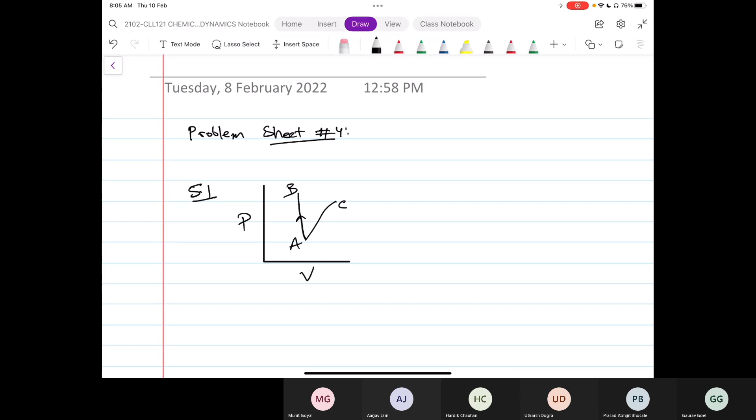Problem 5.1. It's asking you if two adiabats, two reversible adiabats, can intersect. So we are going to prove it using the contradiction route. We assume two reversible adiabats are intersecting. AB is one of those adiabats and CA is another adiabat. So let's assume they are intersecting.

Reversible adiabats are isentropic, so the entropy change along these two would be 0. And now I connect. I am free to choose any point on B and C. That means B and C I am making arbitrary and connecting them in such a fashion that the path from B to C is isothermal reversible. And we are not making any assumptions up to this point.

All right. So you can prove the contradiction now via several routes. You can show that the entropy change from B to C will not come out to be 0. So on the circular path, entropy change is non-zero. Entropy is a state function. Therefore, it violates the second law, because entropy is a state function by the second law.

Another option is that there is a cyclic process happening. So statement 1A, you can try to attempt. Statement 1A says in a cyclic process, all heat absorbed cannot be converted to work. So let us see if we can prove it otherwise here. If all the heat absorbed in a cyclic process is getting converted to work, again it's a violation of statement 1A of the second law.

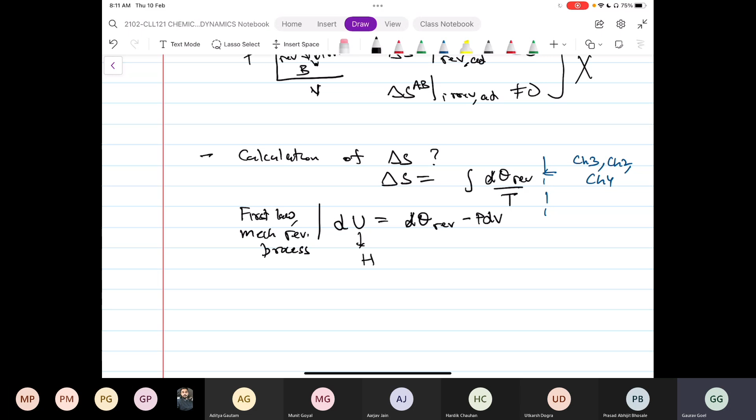I'm going to use h instead of u, and that is just because of the convenience of the final set of equations we are getting. So there is no other reason. You could have worked with u also. So I make that substitution, and this is the new equation I get.

If your process is at constant V, you will use the first one. If your process is at constant P, you might find the second one to be more convenient, in the sense that the reversible heat transfer is related to enthalpy changes at constant pressure, and to internal energy changes at constant volume. Okay, so that is why we have two options here.

So now let us look at the constant volume case. Work is 0, and we have an expression for the internal energy change, which is CV dT. So from here, now you can write down the entropy change in going from T1 to T2 as this integral. Further, if CV is constant, you can simplify it more.

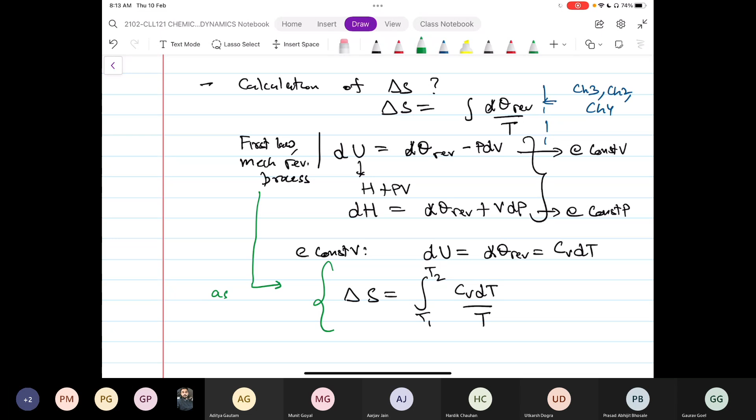Now, if you look up the derivation route, I wrote this equation by taking some assumptions. What are the assumptions I have taken in deriving this equation? Anyone? What assumptions have gone in? There is no penalty for speaking up. Ideal gases. I have not so far, right? Mechanical reversible at constant volume. Mechanical reversible, constant volume. Okay.

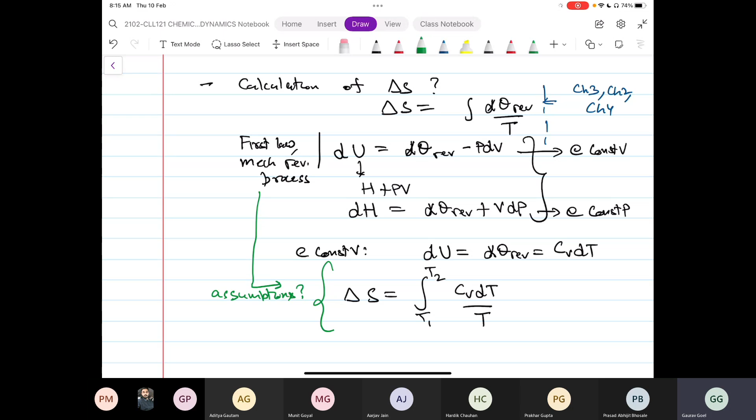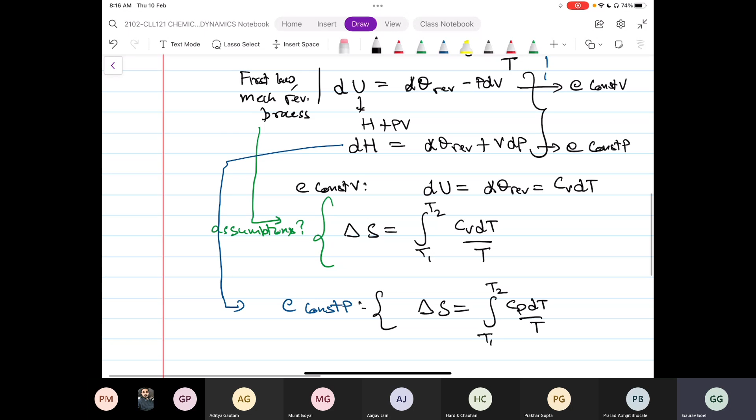Now, using this second route, at constant pressure, dq you can write in terms of enthalpy changes. And fully general, let's say the last case, where I just start at the first law and mechanically reversible. For now, I will give you the expression for ideal gas, because for ideal gas we have an equation of state available, which will be required.

What you see here is, for this part, V as a function of P and T, I am going to use the ideal gas equation of state. Once we learn how to calculate enthalpy changes and internal energy changes for real gases, we will be able to use the same route for real gases also. But for now, let us focus just on ideal gas.

So now for the fully general case, I'm not saying constant volume, constant pressure, nothing. All I'm going to do is substitute in that initial equation dq in terms of enthalpy changes and the V dP term. The reason I am doing that is going to be clear here: I get an equation where everything on the right hand side is available for me, because I know how the specific heat capacity of an ideal gas depends on temperature. So this is the fully general form.

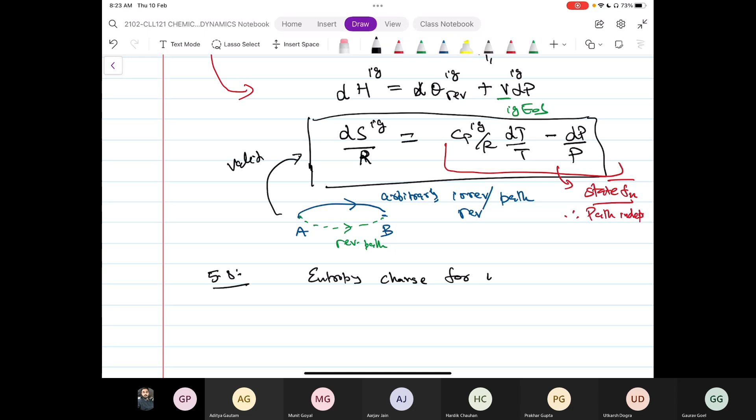So now let us try to solve some problems using this. Any query? No, sir. So problem 5.8 will make use of one of these equations, focusing on entropy change for water when its temperature is being increased at constant volume. We have already derived the relevant equation for this, so I directly use it.

Further in the problem statement, they say you can take Cv for the given range to be constant. So I get a simple expression. Now for the reservoir, they want us to calculate the total entropy change. The way this process is happening is by bringing water in contact with the reservoir at high temperature, either in one step or in multiple steps.

Calculate the entropy change of the reservoir also. In the lecture class, it has been mentioned that for the reservoir, you can assume the process to be reversible always. The main reason for that is there are no temperature gradients in the reservoir. So I can take the process to be reversible on the reservoir side always. And because the reservoir is at constant temperature, the integration would still simply give me minus Q by T.

This Q we have already obtained. This is the Q for the system. Cv they are saying we can take constant. So this is what I will get for the reservoir side. Now there are several cases given. In case A, you have a single reservoir at 100 degrees Celsius and the system is taken from 0 to 100.

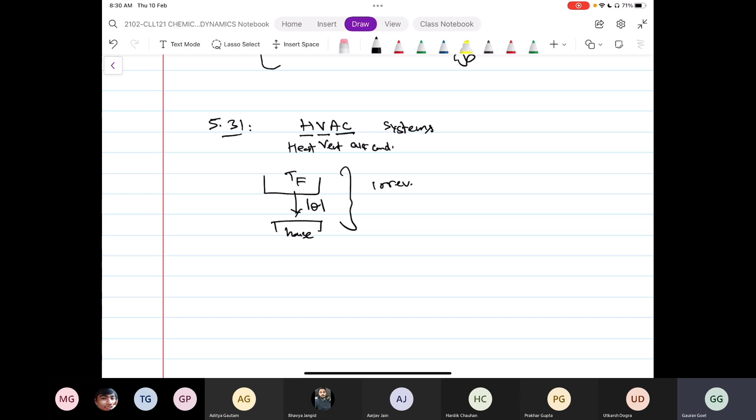So here they are giving you a very simple example. In a house, heat is provided from a furnace, and let's say the requirement of the house, that means the heat input to the house, is fixed, some value Q. This is being done essentially irreversibly. This is very similar to the example of putting a rod between a hot and a cold object. Rather than putting a Carnot engine, which gives you fully reversible transfer of heat, you are putting just a conducting rod between the two, which gives you fully irreversible transfer of heat.

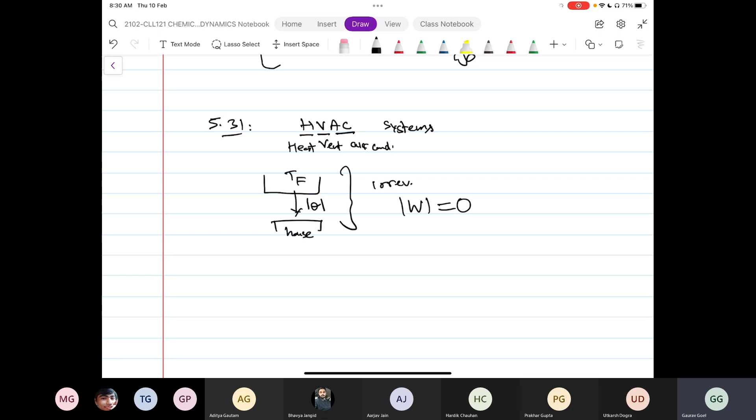In doing this, you clearly see no moving parts, nothing. So the net work output is zero. Thermodynamic efficiency in some sense is zero. You're not extracting any work from this system. Now they're asking you to look at the other extreme where you make this heat transfer reversible.

So we want heat exchange with addition of some Carnot engines and Carnot refrigerators. That we have seen in the lecture class also. So if you do this, you might be able to manage reversible heat transfer.

Okay, and if you want to make a connection to a practical scenario, then yes, it won't be a fully reversible operation, in the sense that you will not get delta S total to be zero, because you don't have a Carnot engine or a Carnot refrigerator in reality. But you can reduce the inefficiency. That is the only thing you can do. You cannot make inefficiency zero, you cannot make lost work zero, but you can make it smaller.

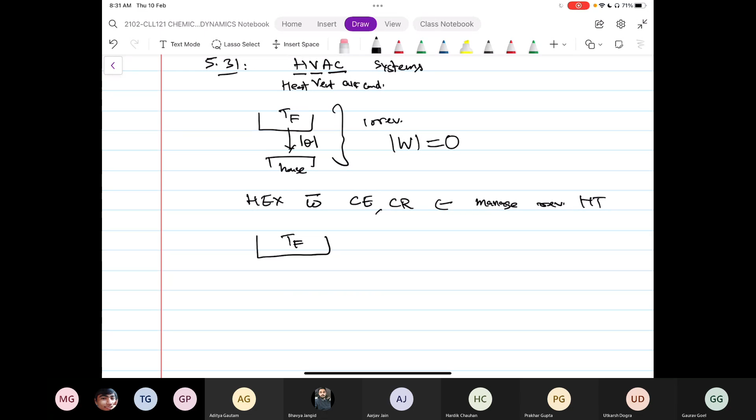Now our design involves putting a heat engine, furnace, and the house. Again, you can compare it to other processes. For example, throttling: you go from high pressure to low pressure without obtaining any work. So in some sense you are wasting resources. If I look at a Mercedes high-end car, they are using CO2 as a working fluid, and they have replaced the throttle by a device which can produce work. They call it a turbo expander. So something like that we are seeing here also.

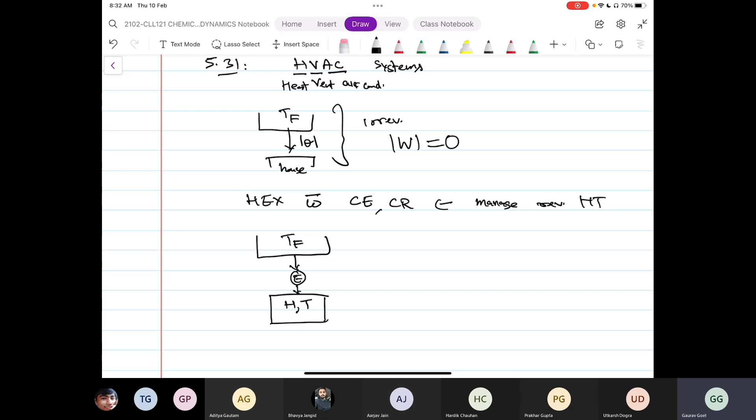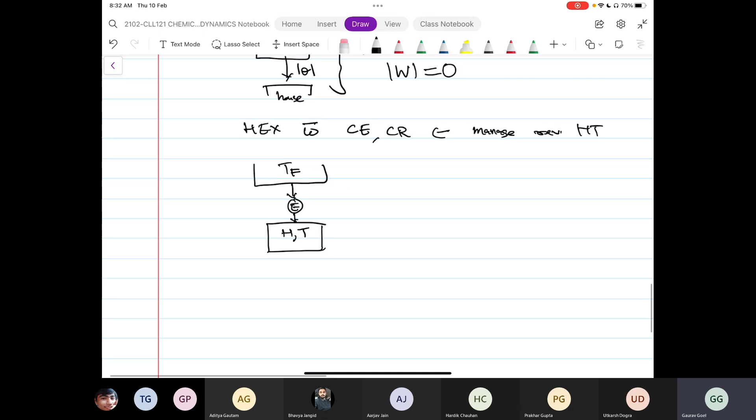So putting a heat engine between two reservoirs, one at high temperature TF, the other which is my house at temperature T. Now we use the work produced by this heat engine to drive a refrigerator, which is able to move the heat from low temperature. I have surroundings, the outside of the house, at some low temperature, maybe 0 degrees Celsius. Let's say I want to maintain the house at 298 Kelvin, 25 degrees Celsius. So we use the work obtained from this furnace to drive a refrigerator.

You can put now the Q values. The heat extracted from the furnace, let's say, is QF. Heat added to the house from the top side is Q1. Heat added to the house from the bottom side is Q2. Heat extracted from the surroundings is, let's say, Q sigma. So these are all my individual numbers. One constraint is that the total heat added to the house is the same as the irreversible case. Total heat added is still Q, but now we are doing it via a different route. Black box of sorts, you will see the house is still getting the same net input of heat. So we have not changed that design element.

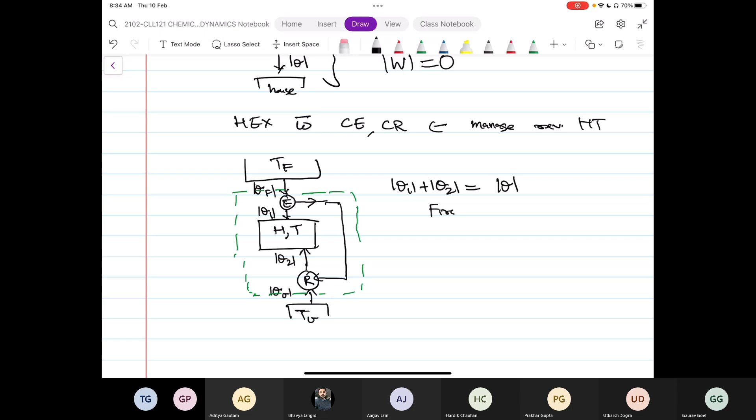Now to obtain my unknown quantities, I will combine the first law and the second law. So this is the net heat added. Yes, this will also be fine because the work term from the engine is cancelling the work term from the refrigerator. So you will get QF plus Q sigma equal to Q. That is my first equation. Then you put the second law because the process is reversible, so the total entropy change must be zero.

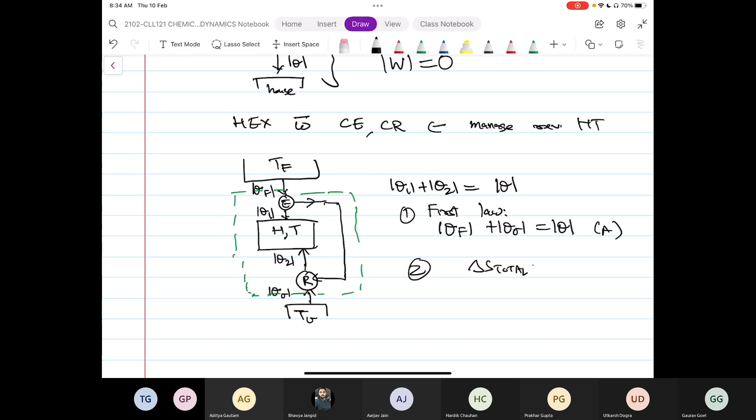So you have a reservoir, which is the house, another reservoir, which is the furnace, from which you are removing heat, therefore the minus sign. One more reservoir, which is the surroundings, from which again you are removing heat, so again the minus sign. In the house, you added heat, so the plus sign. So this is your second law. Now you can just combine these two equations and obtain the unknowns. Again, there is not one way to solve this problem. You could have used the first law and second law individually on the engine and refrigerator. It will increase the maths, but of course you will come up with the same answer. Right? Any queries?

Problem 5.10 is somewhat similar to what we did in the lecture class, as well as one of the papers which I shared. It is asking you to look at heat exchangers, two different operations. Co-current, where both the streams, the hot and cold, are flowing in the same direction. Counter current, where the two streams are flowing in opposite directions.

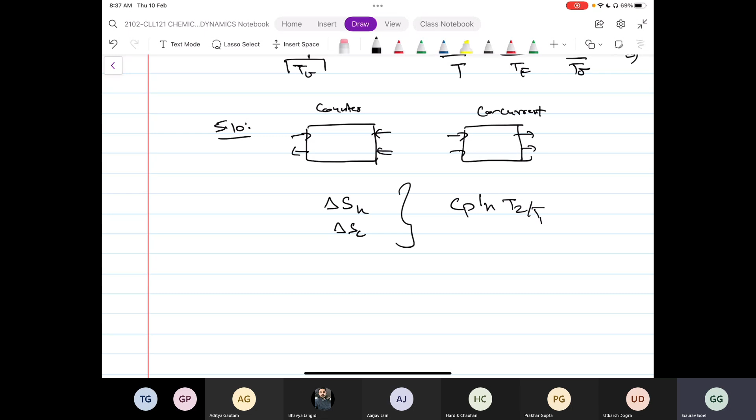If it's a liquid, you are okay with ignoring the entropy dependence on pressure for small changes in pressure. A 5-10 bar change in pressure, even a 20 bar change in pressure, will not matter. If the flowing streams are gaseous, then you will need to include pressure dependence also, because for gases, properties are dependent both on pressure and temperature kind of equally. So this is the formula you will use, and the total entropy change would be just the sum.

And this you can obtain from the entropy balance equation also. Here I'm writing it directly, but you can obtain it from the entropy balance equation. So S gen dot, if you want to calculate, will again come out to be the total entropy change for the flow streams in this case. For case A, given the numbers, this is what you will get. Clearly you can see the process is irreversible.

The inlet temperature of the hot stream is changed from 320, I believe, to 200 degrees Celsius. And still the same delta T is obtained for the cold stream. The inlet temperature of the hot stream, I have decreased it, but I'm obtaining the same temperature change for the cold stream. So what needs to happen?

Total entropy change is 0? No. The process is still irreversible. But the question is that I have decreased the inlet temperature of the hot stream. I have not changed the inlet and outlet temperatures of the cold stream. I have not changed the flow rate of the cold stream. So what needs to happen so that all these constraints are met? You will need to change the mass or molar flow rate of the hot stream. This kind of refers to the paper I have shared.

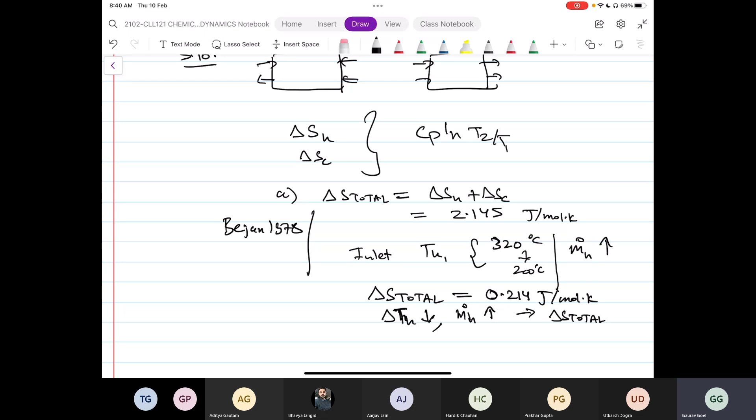Let us see right now, because we are not going to look at the fluid dynamic aspect. So you will see the change decreases. If you do the calculation again, the total entropy change in this case is going to become smaller. So you can clearly see that if I only consider the thermodynamics, if I was only considering this aspect of irreversibility, it makes sense to continuously decrease delta TH and continuously increase mH dot, because doing this will make sure that the total entropy change, that means the process inefficiency, is as small as possible.

However, as discussed in the lecture class, as we increase the mass flow rate, viscous friction effects increase. Think of a pipe flow. If you go to higher flow rates, frictional losses are larger. Those frictional losses also contribute to Sg dot, which we have not discussed in this course at all, but the paper I have shared discusses. So this other contribution to the entropy change, which we have so far ignored, cannot be ignored at high mass flow rates, and therefore there will be an optimal flow rate at which the process inefficiency is minimal. If I only looked at thermodynamics, we would keep decreasing the inlet hot stream temperature, keep increasing the flow rate, and improve process efficiency. However, that is not the case. Any questions?

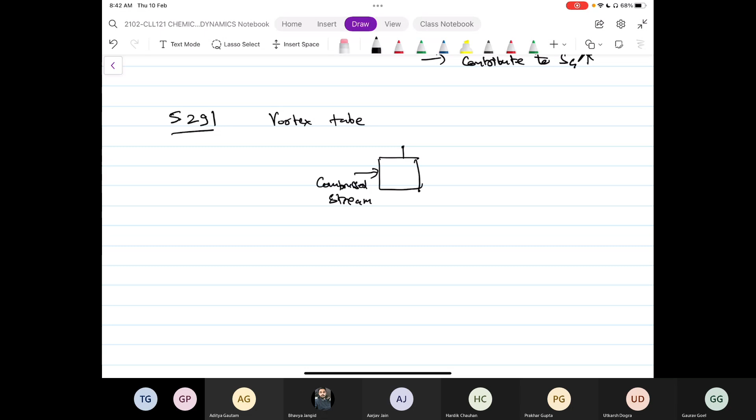Problem 5.29 is essentially an example of the working of a vortex tube. Of course, the vortex tube doesn't look like this. We are just putting a box around the vortex tube. It involves an inlet of a compressed stream at room temperature, and as an outlet, it gives me a hot stream and a cold stream.

So without any refrigerator, without any engine, just by using a compressed stream, I'm able to obtain a stream which is above the temperature of the inlet and another stream which is below the temperature of the inlet. So I can use it in processes where I cannot easily put heat engines or refrigerators, and I still want heating or cooling. That is one means, and that is why it is used in industry.

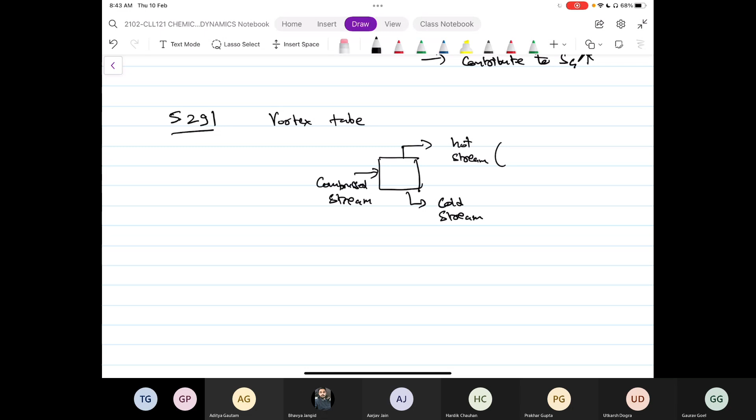Fraction of hot stream is eta H, or NH, whatever you want to call it, and the cold will be 1 minus eta. Okay, so we have, let's say, 1 mole of inlet; eta is hot, 1 minus eta is cold. A typical use of this kind of setup is in spot cooling applications, where you don't have a very large heat or cooling requirement, but you are restricted in space. This will be a very nice setup to be used there.

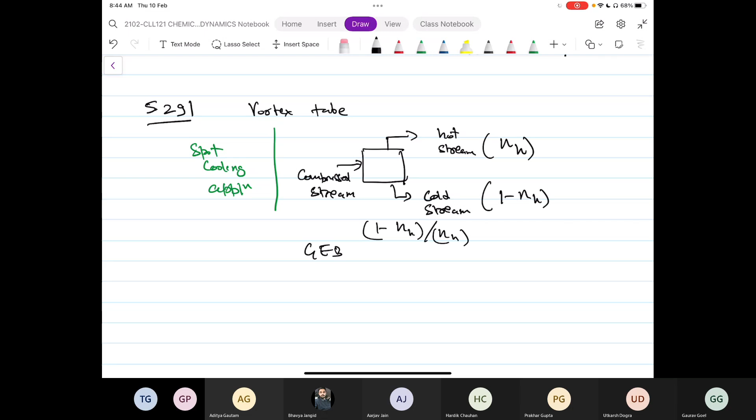So the question they are asking you is how much cold stream you are getting per hot stream at the outlet, or you can say how much cold stream you are getting per mole of inlet stream, whatever way you want to ask it. Okay, so this answer you can get by simply applying the general energy balance. Okay, and what you will obtain is

processes are adiabatic, no moving parts, etc., etc. So these are the standard assumptions which we are taking. So this is the equation you will end up getting, and now delta H equal to 0.

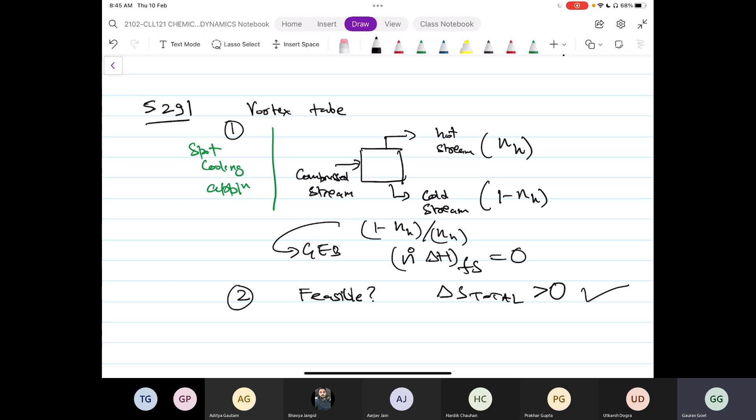The second part they are asking is, all right, you have designed this process, but is it feasible? The feasibility check in thermodynamics at least requires you to calculate the total entropy change. If it is not violating the second law, it is going to be feasible. So you calculate the total entropy change, all the numbers are given, and you would indeed find that the total entropy change is positive. That means the process is feasible. Okay, any queries?

All right. So this 5.29 in a way gives you the thought process you have to take up when designing a new system. You ask what endpoints you want, what initial points you have, the feasibility, and the reversible process that gives you the best you can get. Of course, whether you can do it or not, and secondly, how much, what is the cost? Okay, what is the inefficiency? And then you can go to the next step, which is actually designing the process.

5.39 gives you an example of a turbine, which is producing some work. So this is an adiabatic expansion process. So these are the given details, okay? And the process is given to be irreversible. Again, right now we are restricted to using ideal gas as a working fluid. In Chapter 6 and Chapter 7, we will use real gas as a working fluid, and we'll talk in much more detail about how to design turbines, okay?

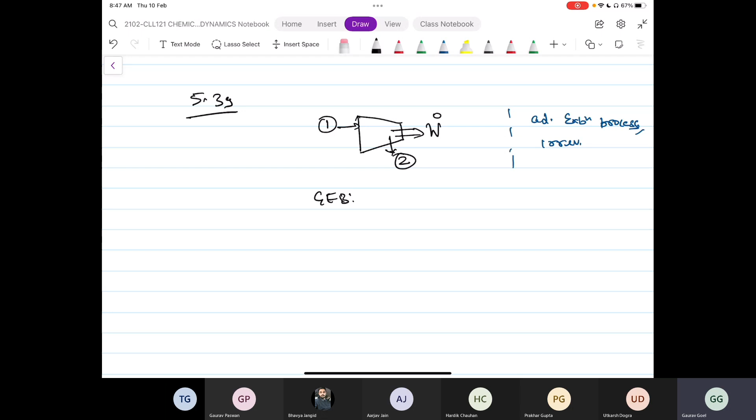So we are going to see just the initial aspects of that, but much more detailed analysis on turbine design in terms of inlet conditions and outlet pressure, we'll talk about once we get to Chapter 6 and Chapter 7, where we can go to real fluids. For example, one very standard fluid used in turbine applications is steam. Okay, so water, steam. We'll discuss how to design a turbine with water or steam as a working fluid. So you apply the general energy balance, which you have already done in Chapter 2. And the work output from the turbine you will be able to write in terms of enthalpy changes only. I'm just using the standard approximation which we have done earlier also.

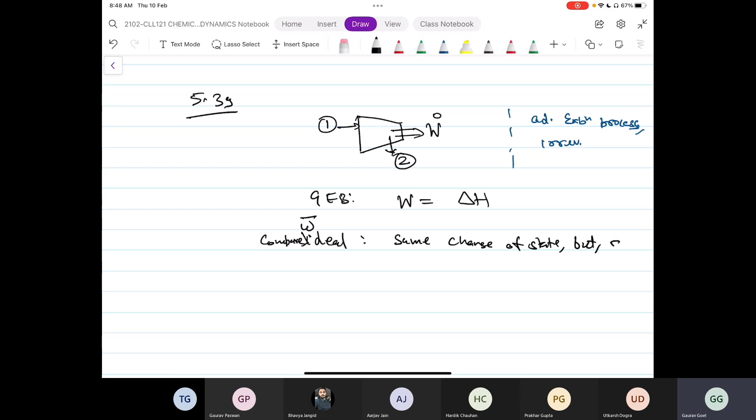Now they're asking you to compare this actual process against the so-called ideal process. We have defined the ideal process as a process with the same change of state but carried out reversibly. Okay, that is how we have defined our ideal process. And the efficiency which comes out is known as thermodynamic efficiency. Another kind of efficiency is typically defined for turbines. If you go to the market and look at the turbine data sheet, sometimes you will see the word isentropic efficiency mentioned rather than thermodynamic efficiency.

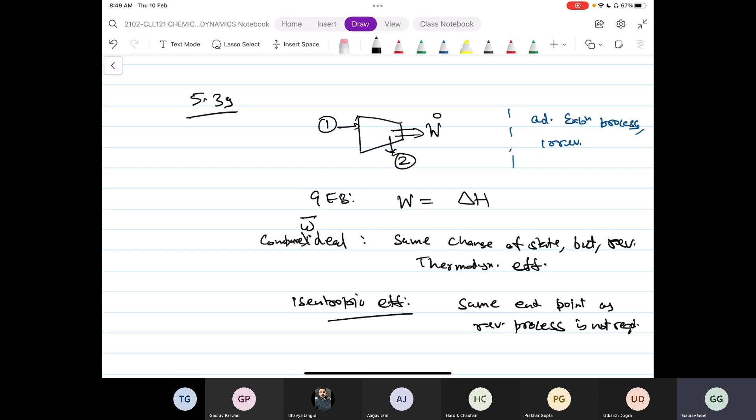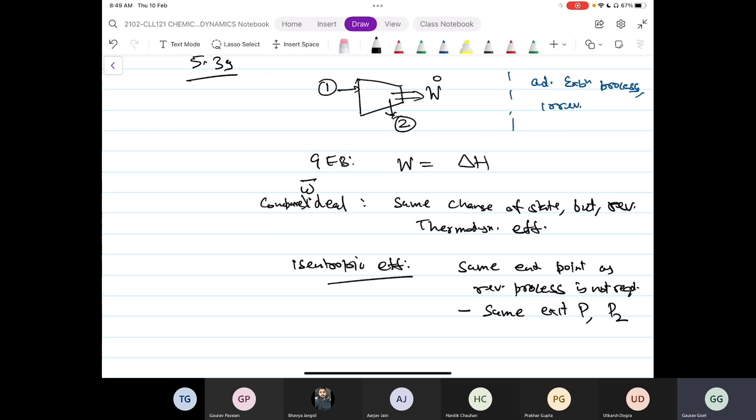And the reason is that for turbines, the same endpoint as the reversible process is not required. So it does not form the correct comparison. The end state exactly is not required. Rather, I have a constraint on the exit pressure. On the inlet, I have a constraint on P and T, that this is the P and T I am working with. However, on the outlet, I am not so much concerned about the temperature. Rather, I am only concerned about the pressure at the outlet. Okay. So we define the comparison point as an adiabatic reversible process with the same exit pressure. Okay, and adiabatic reversible means isentropic. So that is why we call this kind of efficiency isentropic efficiency.

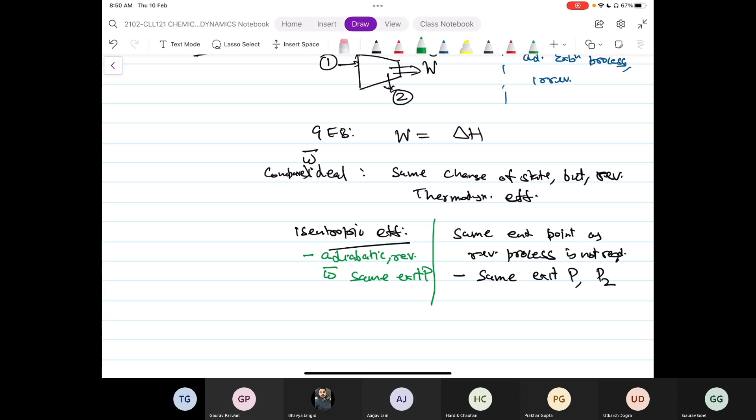So you can try to do it for both cases. Your actual process is adiabatic and irreversible. Now let us look at the ideal process as per the thermodynamic efficiency: the same change in state.

The process I can say is reversible, that is a requirement. Further, I can say for sure the process is non-adiabatic also. This I'm leaving to you to show that indeed that would be the case. Okay, so if I'm comparing an adiabatic irreversible process, this I've actually discussed at the very beginning of this tutorial. So I'm comparing an adiabatic irreversible process

against a reversible process. Okay, so here the comparison is between adiabatic irreversible and reversible, between the same endpoints. These three things say for sure that that means the ideal process would be non-adiabatic. Okay, so this I'm leaving to you.

In terms of calculation, all the equations have been given. For example, for the ideal process, the work done we have stated. For the case of single flow in, single flow out, steady state, steady flow operation, etc., this is what you end up getting. Okay. So the numbers I will give you so that you can check your calculation. The actual work comes out to be 3753. Ideal work would be larger or smaller, magnitude wise? Larger. The lost work is the difference between the two.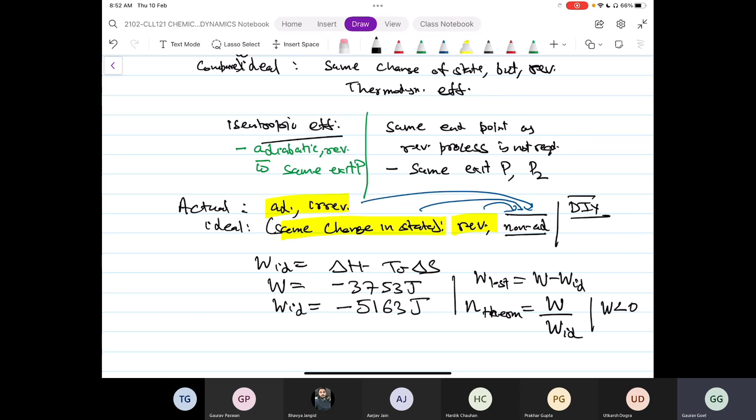So 5.45 is again looking at the turbine, and the analysis of this problem would come in very handy when I talk about design of a turbine to improve its efficiency. Okay. At this point, the analysis is simple. They're talking about two possible endpoints, 2 and 2 prime. 2 is the actual endpoint, and 2 prime is in the ideal case, ideal isentropic case. Okay, so this is the other aspect which I talked about just now, that for turbines, rather than talking about thermodynamic efficiency, we rather talk about isentropic efficiency. So both the processes now, 2 and 2 prime, are adiabatic. Irreversible process because that is the actual process. 2 prime is our reference process, which is the reversible process. Okay, so those are the details which are given to us.

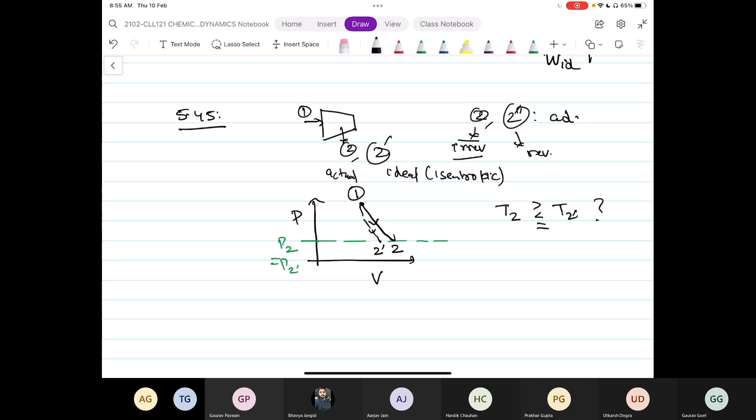Yes, I am going from 1 to 2. And in other case, I'm going from 1 to 2 prime. Okay, so the location of 2 and 2 prime, I have actually drawn after solving the problem. What they are asking in the problem, they are asking us to compare outlet temperatures. Okay, so is the outlet temperature in the ideal process equal or greater than the actual process? So that's what they are asking us to do. All right, so let us see how to do it.

I know that for the reversible process, entropy change would be 0. Okay, and for the irreversible process, it would be positive. Why I am writing down the second law in terms of system only? It is applicable to the total entropy change. But here I have written the second law for the system only. Why? Because it is adiabatic. And therefore, del S surrounding becomes 0. Perfect. So entropy change of surroundings is 0.

Therefore, the second law is reduced to entropy change only. All right. Now we already know how to calculate the entropy changes for the system. So for the irreversible case, because now the working fluid is a gas, therefore I will need to include both temperature and pressure effects. And I'm taking the gas to be an ideal gas. For the reversible, temperature change is from T1 to T2 prime. The second term is the same as the irreversible part. Okay. And now you take the difference of the two, delta delta S. Looking at these highlighted things, you can see that this quantity must be positive because irreversible is positive, reversible is 0. And from the maths, I can find out the expression for delta delta S.

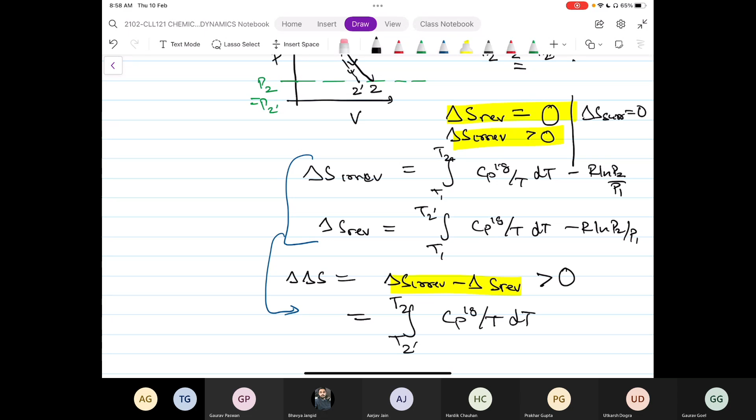And from here, I can conclude this quantity needs to be positive. So the entire thing we have reduced to this last boxed equation. If this is the case, it can only happen if T2 is greater than T2 prime. The maths proof I leave to you.

So why can I say this convincingly without any doubt? What are the requirements on the integrand which ensure that I can indeed say T2 must be greater than T2 prime? Anyone want to tell it now? Or maybe you look later, go to your high school maths, and find out why this is true.

All right, so that's all from my side on chapter 5. And now we have several minutes left. If you have any queries or questions on this chapter or chapters before, you can ask.

Sir, I guess CP ln T2 by T2 dash will come on integration. So if you take CP constant, then yes, it becomes easy, right? You don't need any theorem. But if CP is not constant, it's a function of temperature, then what are the requirements on the integrand? So you're right. If I take CP to be constant, then it's very easily seen mathematically that ln T2 by T2 prime comes out to be positive. So therefore, T2 is above T2 prime, right?

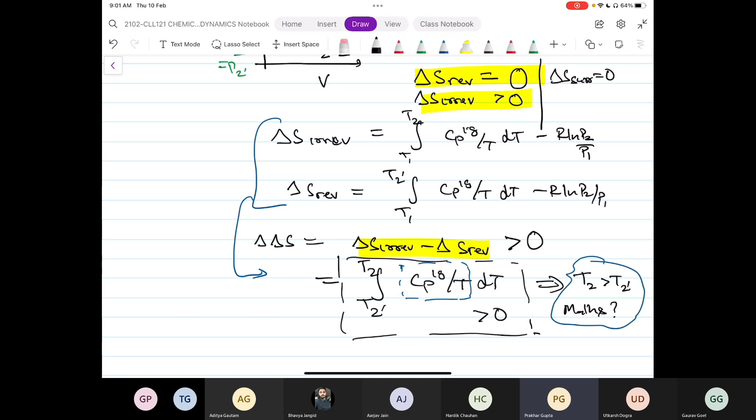So, sir, I'm asking about the general requirement for CP we are considering. What should be CP by T, the integrand? What should be the general requirements for the integrand for this to be always true? Okay, I got it.

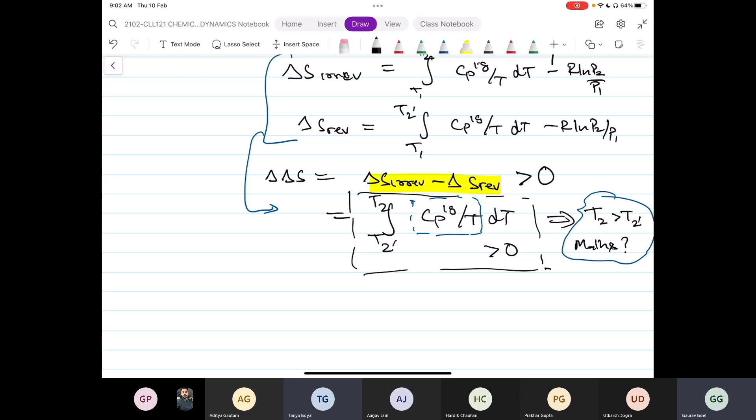Any other queries from previous problem sheets or from the lectures, please feel free to ask. Sir, I had a doubt from lecture 5, where we were discussing the PV phase diagram. You had said that when P is greater than P saturated, then T is less than T saturated. But this was not evident from the graph. How are we concluding that T is less than T saturated from the PV diagram? I was not able to visualize it properly.

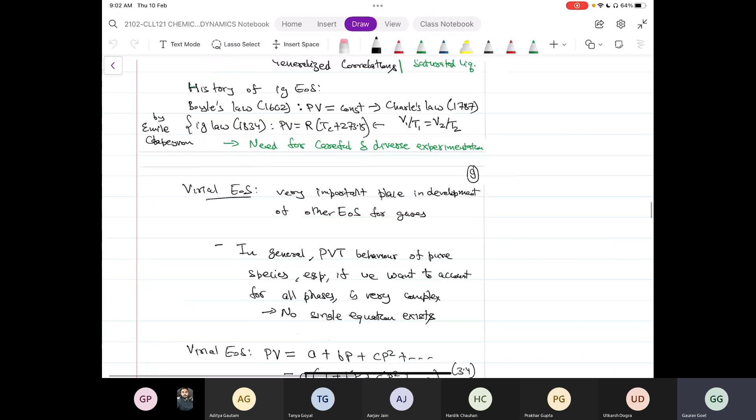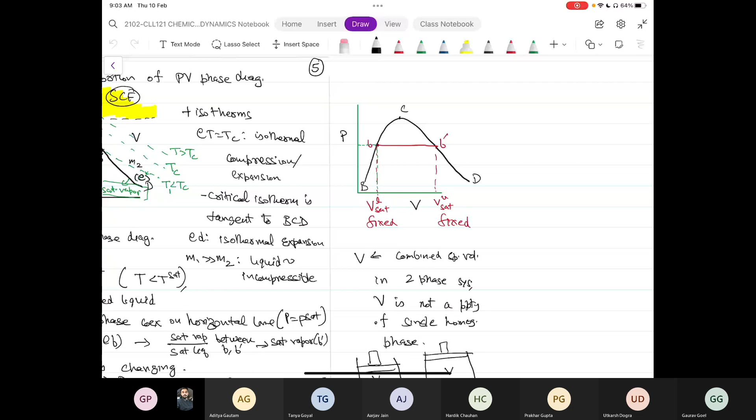Now, the other way to visualize this would be to fix the pressure and compare against the saturation temperature at the given pressure. So you can see by that route, the actual temperature is less than the corresponding saturation temperature. So to give either of these two statements, I need to either fix the pressure and ask what is happening to temperature, or fix the temperature and ask what is happening to pressure. Yes, sir. Understood.

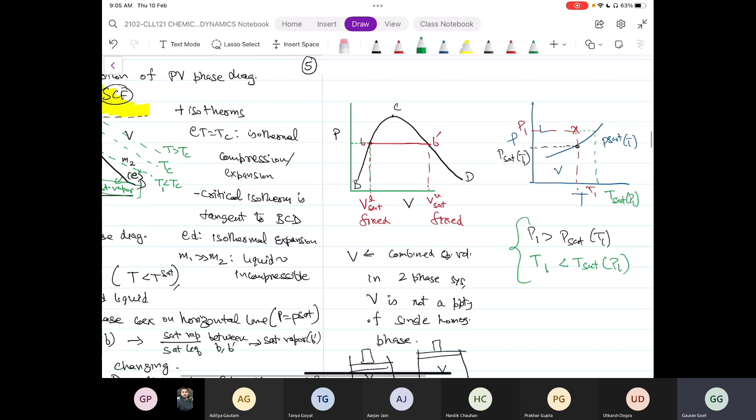It clarifies now. Yes, sir. All right. And so one trivial doubt: if two bodies have the same temperature, is that a sufficient condition to say that they are in thermal equilibrium? Yes. However, what I will also say is they need to be in thermal contact.

If you recall, when discussing these concepts, I talked about two chambers which might be separated by an adiabatic partition. So the concept of thermal equilibrium, or any equilibrium, mechanical equilibrium or reaction equilibrium, is valid only if there is a possibility for that gradient. If they are not in thermal contact, then even if they are at the same temperature, I will not say they are in thermal equilibrium.

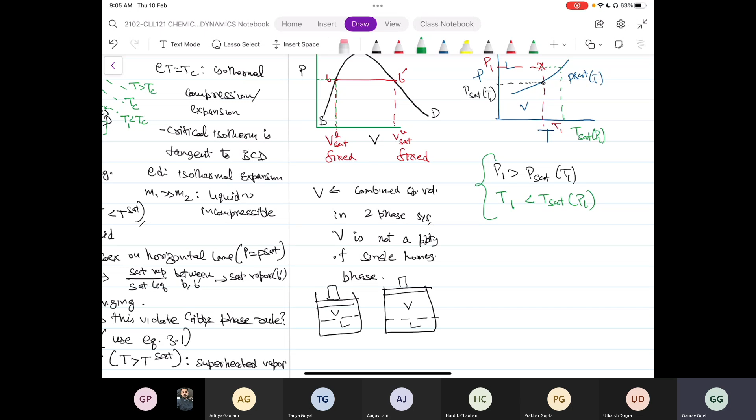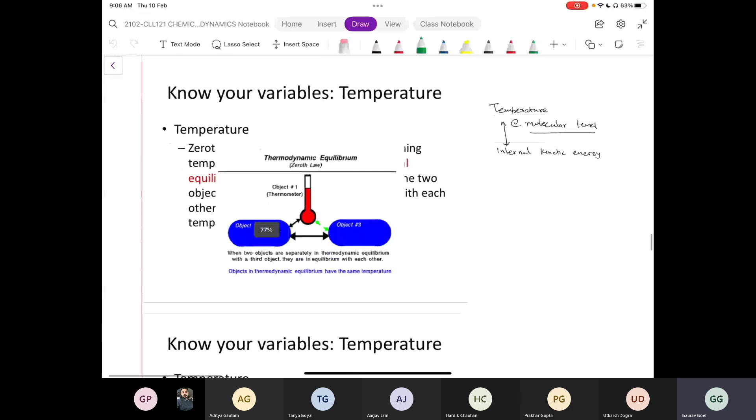You go back to the zeroth law of thermodynamics. Let's see if it's here. Yes, right. So that was our definition of thermodynamic equilibrium. It categorically stated object 2 is in thermal contact with object 3. So if there is no thermal contact, there is no concept of thermal equilibrium. Okay, sir.

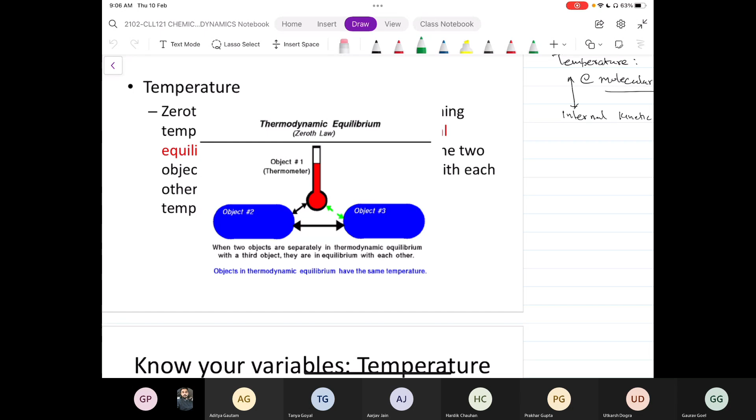Other questions from the problem sheets or from the lectures or anything else? So we can close the class. Okay. Yeah, please go ahead.

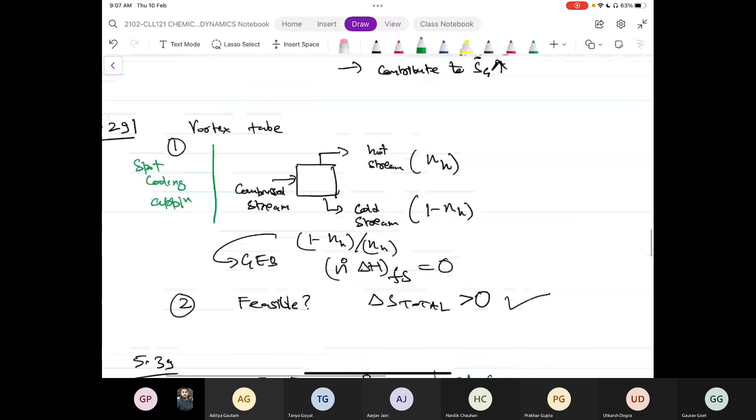In that question of the HVAC system, can we use that engine-refrigerator combination which we discussed in the last lecture, last slide? I mean, that's what we are doing here, right? In a way. In that system, the refrigerator would be taking up heat from the house and giving it to the outside. You mean I don't need the furnace at all? No, not the furnace, the T sigma part, the lower part. Okay, understood.

So see there. House at T. So you're saying essentially if this is the scenario, right? And I believe there was some other temperature there also, and then you had surroundings, something like this. You can have T sigma here and you can have TF here. Maybe that would be exactly what we are doing in this case. So you are putting heat from the furnace. So what do we want here? T sigma. Easiest could be maybe we actually make this as TF. This could be your house.

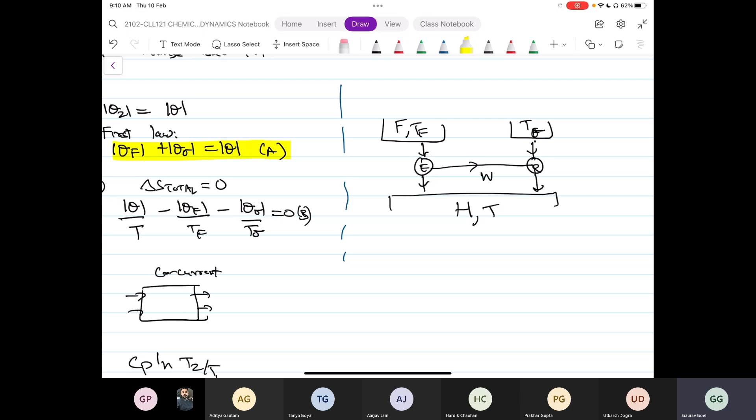The drawing on the right is similar to what I drew in the lecture. The only difference is there we were getting net work output from the process. Here, my concern was not net work output, but rather to decrease the fuel requirement in the furnace. Whatever work is being generated from the top part is being used fully to drive the bottom part, the refrigerator, because here I'm not interested in extracting work. But in that Mercedes car example I gave, that's exactly what they are doing. They are extracting work by converting an irreversible throttle process with zero output to a work output in a turbo expander. So it just depends on the end goal. Here the end goal is to decrease the fuel consumption of the furnace. Yes, sir.

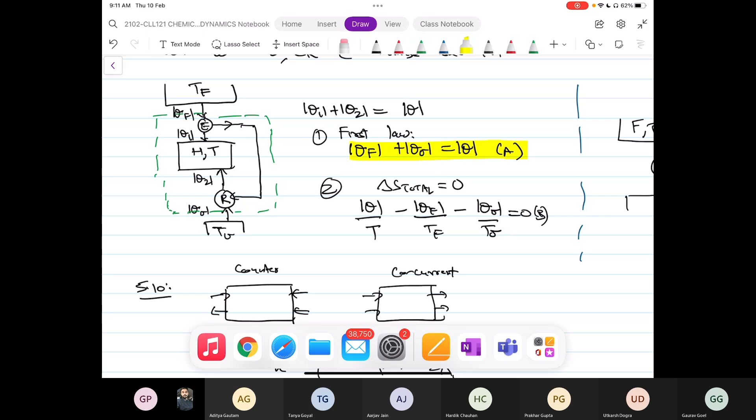Okay, anything else? Okay, so I believe we should have a minor exam every week. That way the attendance could be higher in the classes. Let's stop recording.